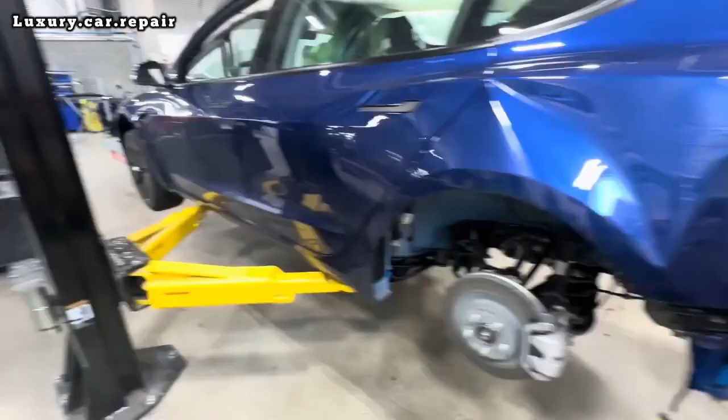So what we're doing now is we're going to set up this Celette Bench. Let me show you - here is the Celette Bench and here is our data sheet. We're going to set up these 4 points here, the front subframe, and these ones here, the rear subframe. We'll set them up here, we have our MZs there, our pistons are in there, and our other points are there as well. I'm going to set it all up here, slide that under there, and we're going to drop this car on top of it, and then we'll be ready to do the back end.

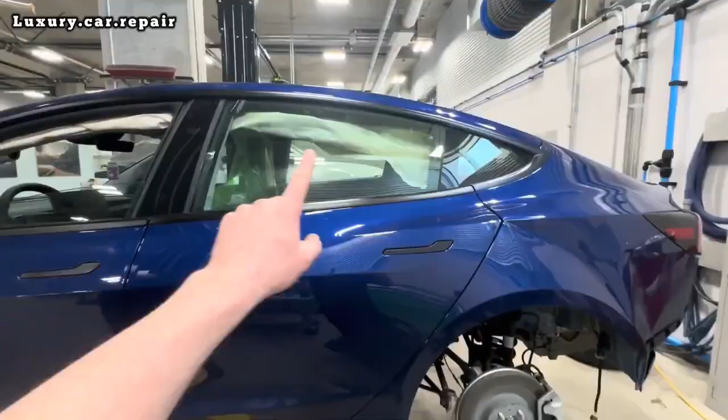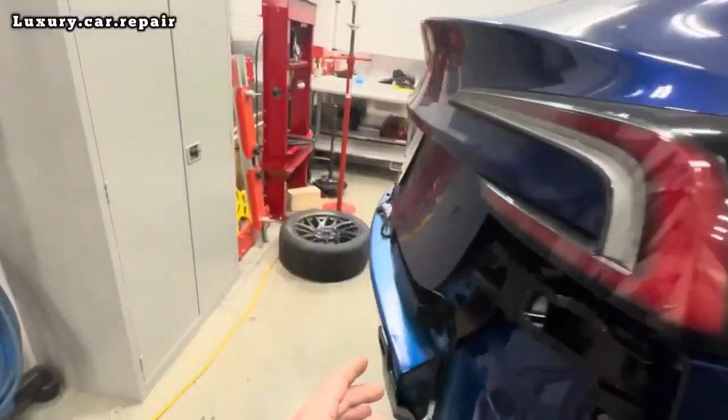Let me just show you the car again real quick. All the airbags are gone in the car, seat belts too. You can see there, it's pushed right up there, put a big kink in the quarter panel. You can see the tailgate won't even close because the latch and the striker aren't even lining up.

So anyway, let's get this one going.

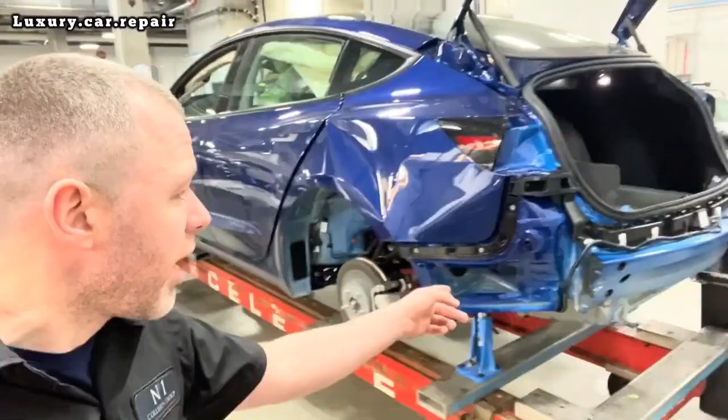Hey everyone, so now we have the car here. I am going to do a lot more R&Is. We have to take off like these, called the hockey bracket going around there, take off the rebar, take off this bracket, take out the charge port. I'll be taking off quite a bit, taking a few trims out, some stuff over this side as well. So a bit more R&Is, and then we'll be able to get this show on the road.

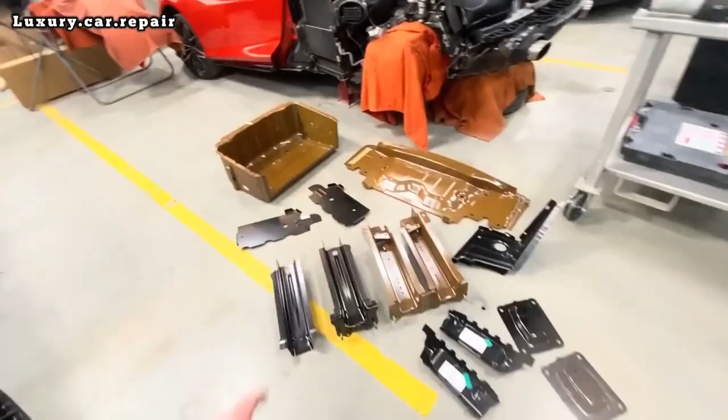Have all the parts here - end panel, trunk floor, frame rails, trunk floor extensions, end caps for the frame rails, quarter extension, wheelhouse extension. The only thing I don't have here right now is a quarter panel, but it's just down in parts.

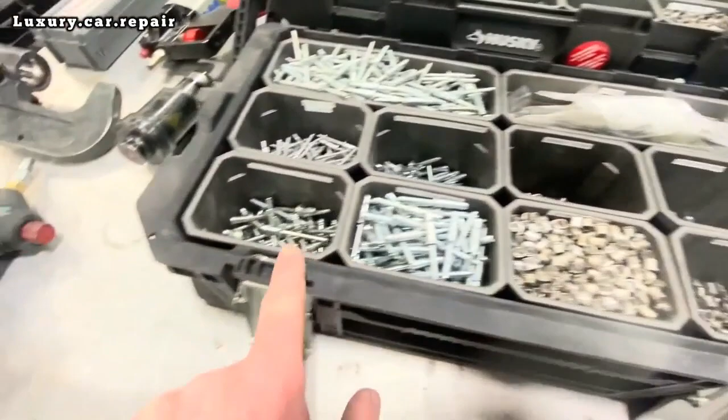What I have here, I got all the rivets. There's loads of rivets here as well, but I have them here already, so I haven't opened them bags yet. I've put a few in here. I like to try and be as organised as I can. So these are the ones we're going to be using - S18s, SO8s, structural 6.5s, your standard 6.5 structural, counter sunk structural, some of these nuts, some of these bolts, some 4.8s - a bit of everything anyway.

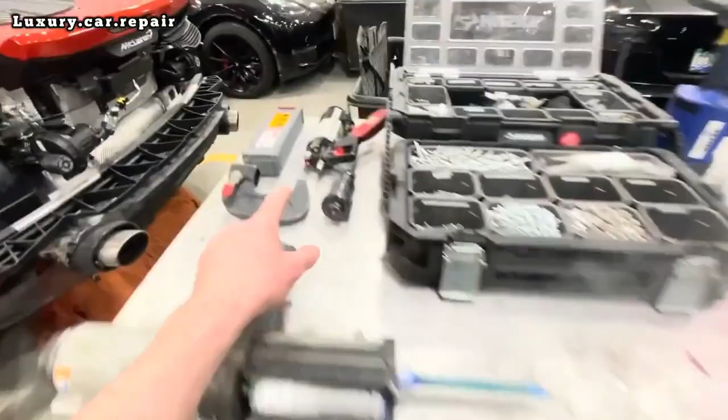So this is the Express 800, comes in this box here. I just have what I need out. This, and these are all the fittings for the top of it. The pneumatic glue gun - we'll be using Fusor 2098, that's for the big structural rivets. This is just for the 4.8s, so it's a lot easier.

But anyway, yeah, you can see it's all creased in there, all pushed in there. This is where the initial impact was - shoved them frame rails over that way, then a kink in that quarter panel right up.

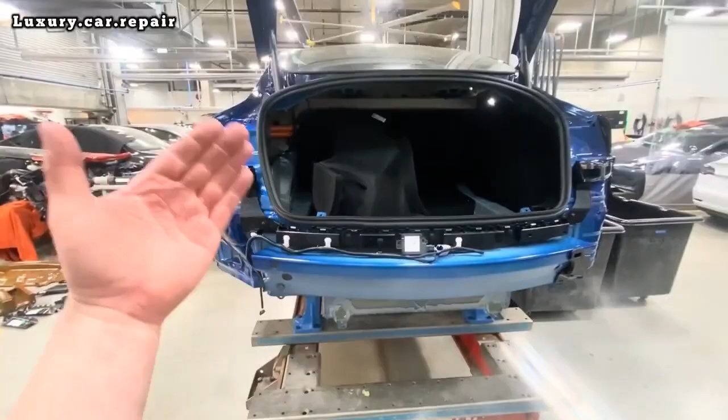So if anyone doesn't know, you're not allowed to pull on Teslas, they do not want you to pull. So I can't put this up in the Car-O-Liner and yank that car over. Literally it's just chop it off, put new ones on. So let's get going.

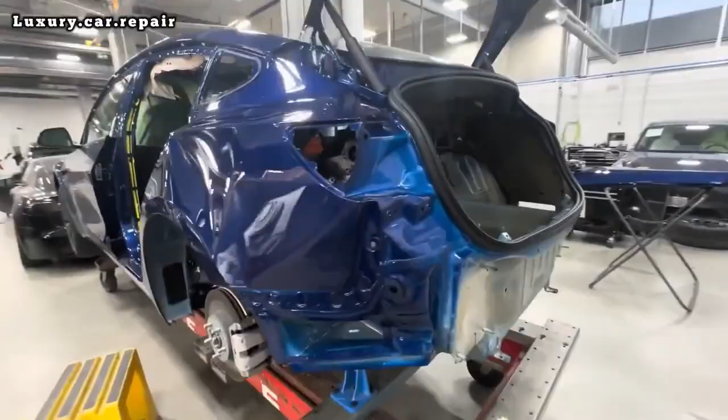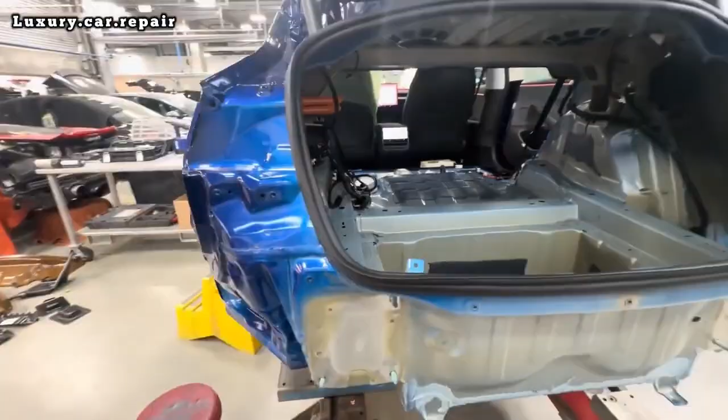Okay people, so we are finished R&I. I've actually just taken that rubber off, but have everything out here - all this is coming out, all this, have everything back there. Just gonna wrap all that up now as well. And then seats are all out, everything, seat belts. So now I'm gonna mask all this up or put a fire blanket over and start getting this panel off, back panel, everything. Let's go.

Before we cut this quarter panel, I just roughly done that with my auto writer.

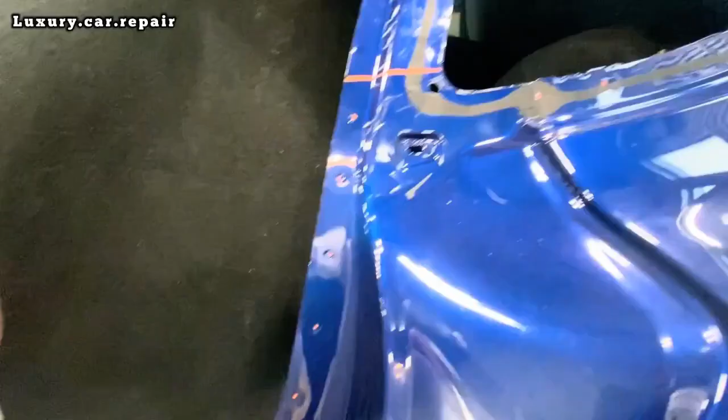It gives you measurements here, from A point down, and that's going to be 75 mil. So it's asking us to go from that line there down 75 mil. That's where the cut is going to be, probably for the finishing cut. I'm going to cut down here just to give myself plenty of room, so when I overlap the new panel, I'll measure it down 75 mil and do that there. It'll also give us a measurement from the hinge here, same kind of thing. So that's what we'll do.

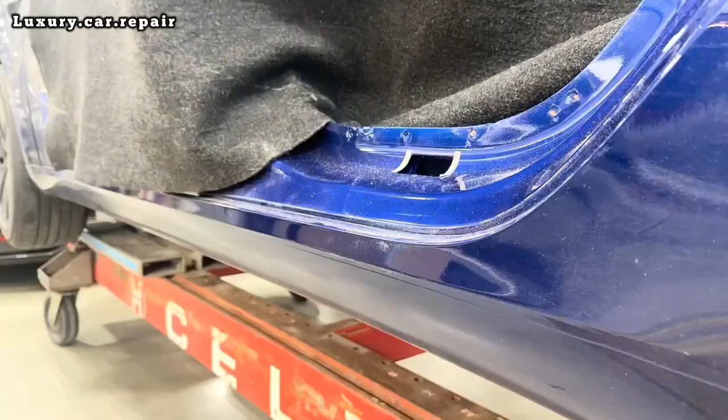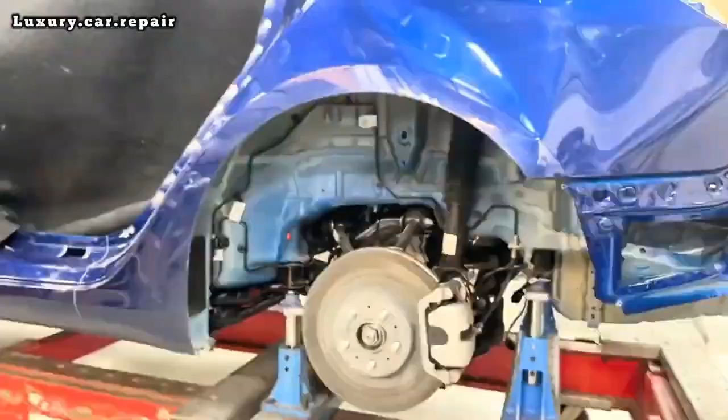What I'm using here is just your normal air saw with a hacksaw blade on it, I just cut it to size. Also, I use a belt sander here with 80 grit, just go through all your spot welds or rivets, just go through the first layer of the panel. Back to where the cut is, what I usually do is put a little bit of masking tape along it, just to give you a guide. I didn't this time because I'm used to it, but it's a good tip if you're new to the game and learning how to do your cuts. Along the arch, we just grind and separate the panels from the outer wheelhouse. Then I get a chisel, use a little heat gun to give it some heat, just to separate the panel.

Okay, here I have my Sawzall from Milwaukee. I'm just cutting away bits of material that I don't need, just to give me more access to more spot welds, so I can get in there with the belt sander, just make it easier for removing.

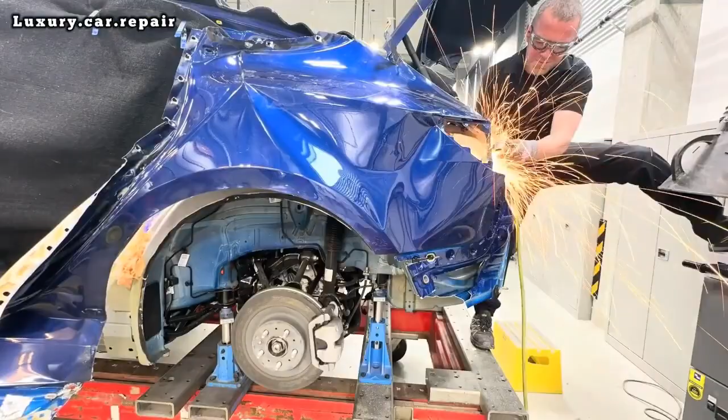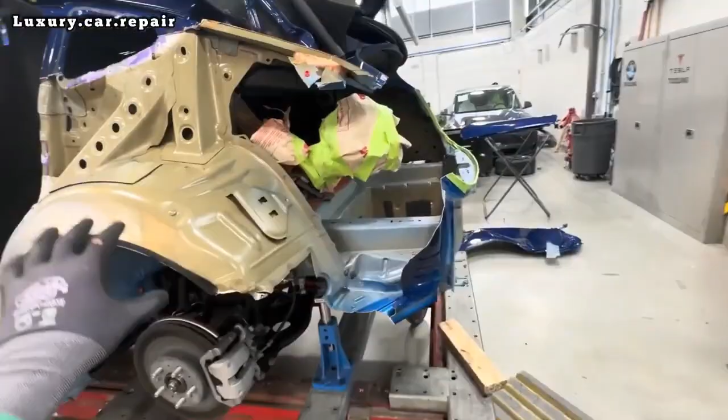Right, okay, just got the quarter off. Still have to get a few up here, belt sand a few of them off just to get this bit off. I'm going to take the rest of this wheelhouse extension off, and then we're going to get all this off with the Sawzall. This thing's an absolute beast. A few of the lads have used it, they've done one or two nodes - if anyone knows what that is, nearly half the car is missing. This thing chopped it all off. So we're going to get in here, cut all this off now, and then start cleaning it all off.

all off. Let's go. Home run, touchdown, buzzer beater, do it all now, all now, top corner.

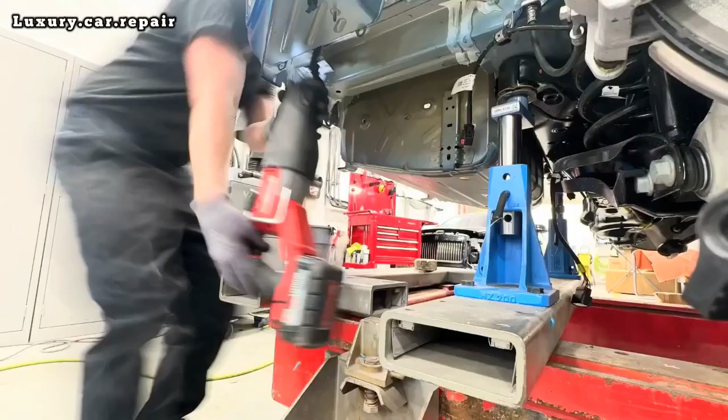So yeah, like previously in the video, I'll just get the air saw or the Sawzall and take off big chunks of this car that's getting replaced. I'm going to cut the trunk floor out here, then get the belt sander and take off this wheelhouse extension just to expose the frame rails a bit more. Once I have good access to them, I'm just going to chop the frame rail off so I can get to the inside of that frame rail at the back there. I have to get some spot welds and rivets out with the belt sander.

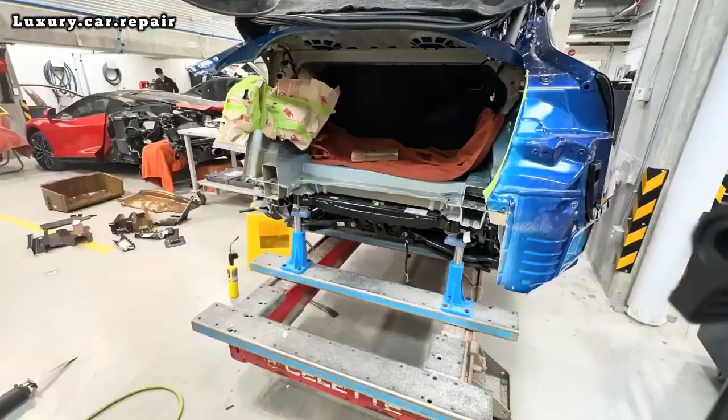No fear. Home run, touchdown, buzzer beater, do it all now, top corner talking home run, touchdown, buzzer beater, do

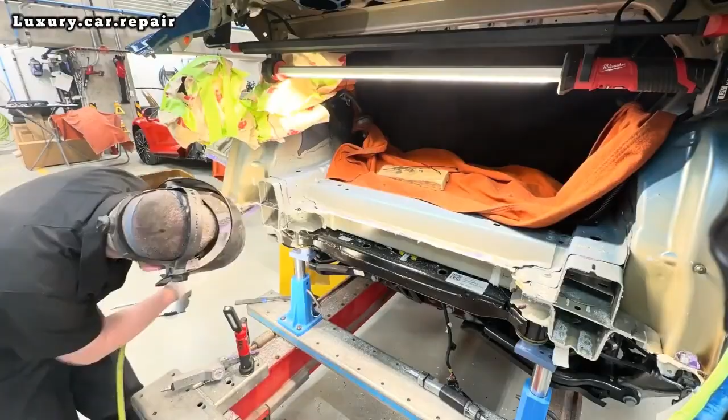Once I can get in here and do all my belt sanding, I'll get a heat gun in there just to generate a little bit of heat, and then I'll put a clamp on here to help me get it out with the slide hammer. Once I do that, it gets right in there, you can expose the whole inside of it, where we're going to have to clean it all off and get ready for the new frame rails.

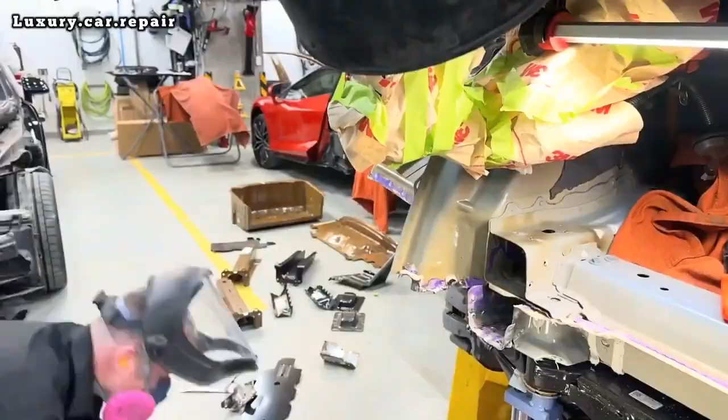Once I get one side done, just move over to the other side and repeat the process. Belt sander, get in there and get all them rivets. Shout out to Milwaukee with their flashlights here, really helped me out, brightened everything up for me. Belt sander, and then we'll just get a bit more heat as well, and then we'll chisel that out too. Same thing again, put a clamp on it and pull it out.

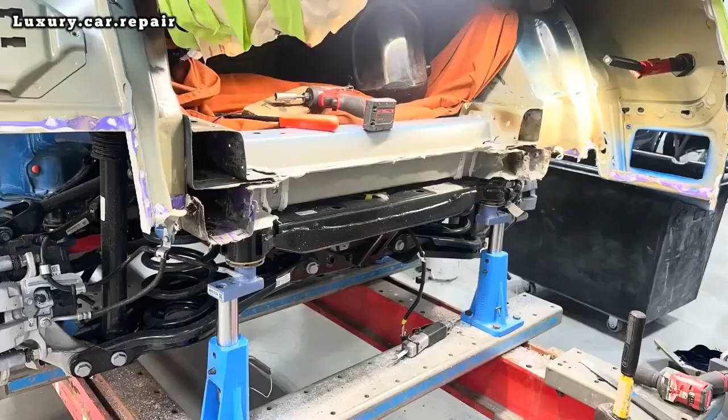Same clothes, still me. Only thing that changes is it changes on me. Home run, touchdown, buzzer beater, do it all now.

Hey folks, I am done for the day. Absolutely knackered. Let me show you how far we got.

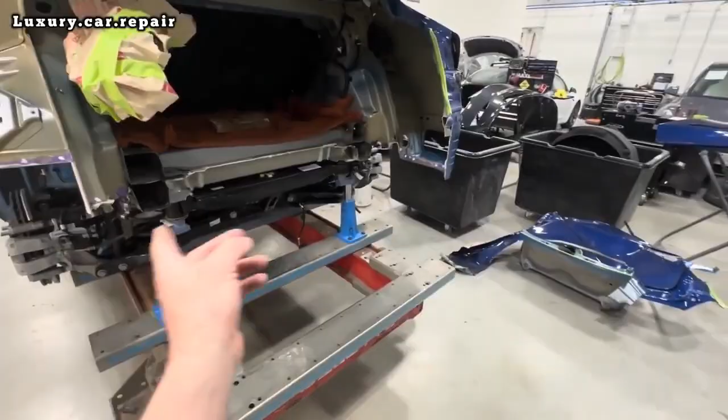So you've seen a few of the time lapses there. Anyway, quarter off obviously, got the extension off, got all the lower extension off here, the end panel off, the floor extension pieces, floor out as well.

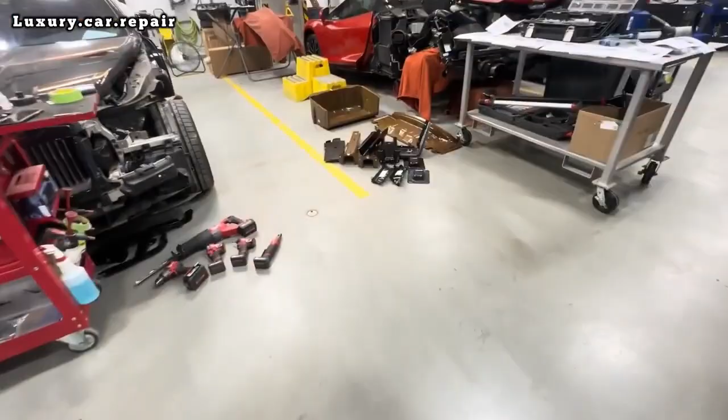I'll tell you one thing though, see these frame rails, obviously I just chopped them off, that's why they came off easy with the Sawzall, but then trying to get the inside of it out, Jesus Christ. There's a top layer, a middle plate, and a bottom layer of the frame rail. Let me show you over here. So the black one here is the lower frame rail, then you're going to have a plate that goes in the middle of it, and then the top layer on top of it. But see right here, like I had to get probably from here all the way into here out of that.

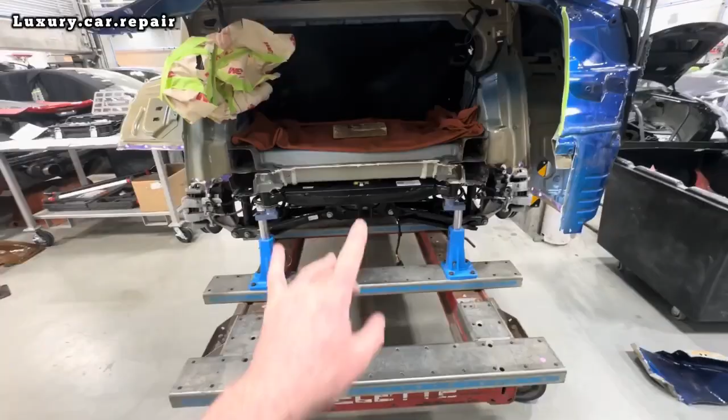It was a nightmare. I had to try and get the spot welds, not spot welds, rivets that are all the way in down there, all glued, to give it a little bit of heat to get it out. We got there in the end though. It was a bit harder than I thought, but got it done.

My back is sore. Monday morning we'll come in, we'll tidy it all up, we'll sit our panels in. We're going to put two points back here on the bench. They're going to show us where the frame rails go.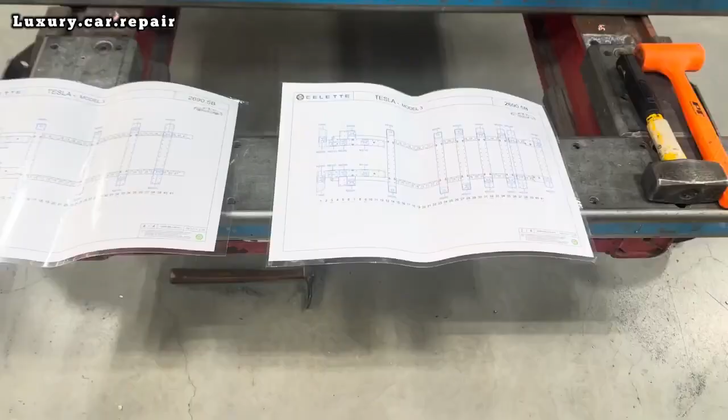Let me show you how you do this. So this is your bench, these are all your beams, which is these here. This is mechanical out, mechanical in. You can see mechanical in has less points, here you have way more.

So what we're trying to do is, we're mechanical in because we have the subframe still there. Just wanted to show you the difference. Mechanical out, you have way more points than you do here. But what we're going to be doing here is, we are going to be using this last one. We can still use it because it's just for the end panel.

See here, we're going to get our MZs, which are them blue things. We get our pistons here, which are them. And then we get our top fitting, which is that other bright blue kind of fitting, which is going to be this here. And what that's going to do is, that's going to go from one bolt.

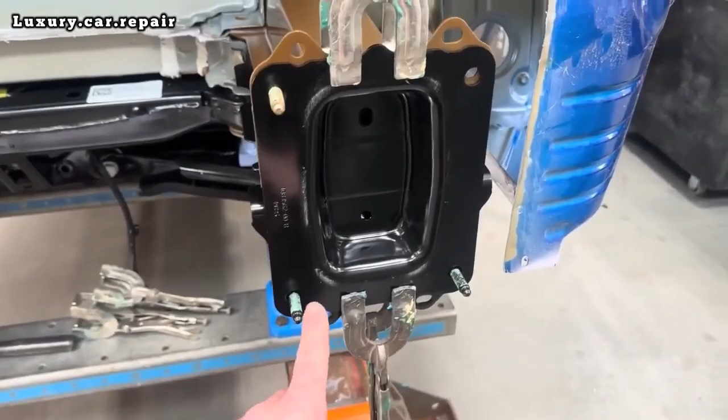Sorry, hold on, we don't have one there. So that's going to go from here across to that bolt, right? And we have that fixture on here, and then we have that all lined up. When it's lined up, then we know that that frame rail is in the correct position.

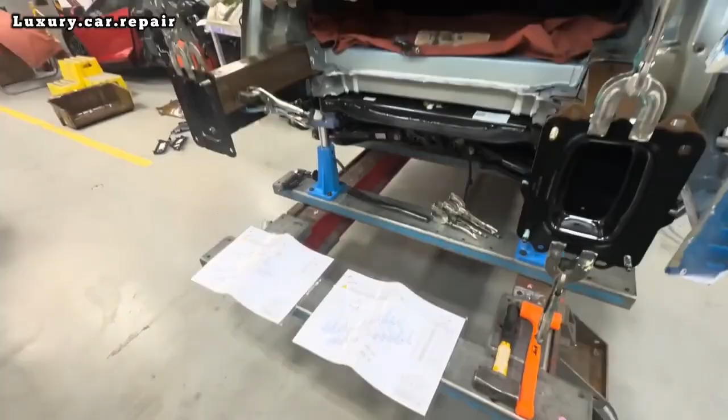All right, so anyway, let's get this point together and make it all make more sense for you, right? Let's go. Right, I went and got it all.

These are your MZs 260s, there's the pistons, and this is a kit that we get. This is for the Model 3, we have all the other ones over there, Model S, Model X. But inside here is the pieces I was talking about, the piece that goes up there. So we have it all here, let's get it on.

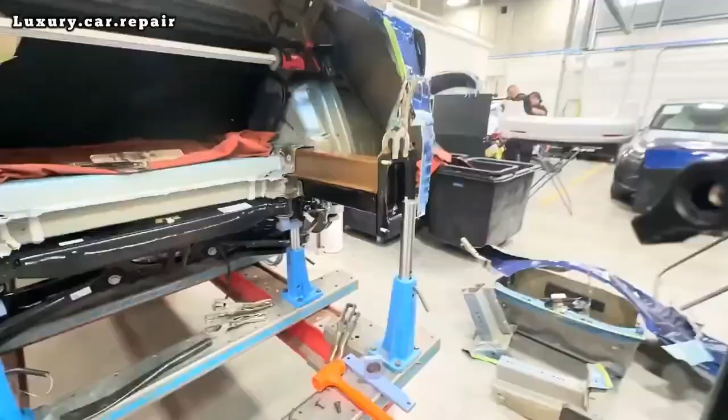So, got the fixtures on, got the frame rails in, got the end caps on, got all the holes lined up there, so got the nuts and bolts on, everything's fitting up nice. Have me old gap persuader there, has a part number now.

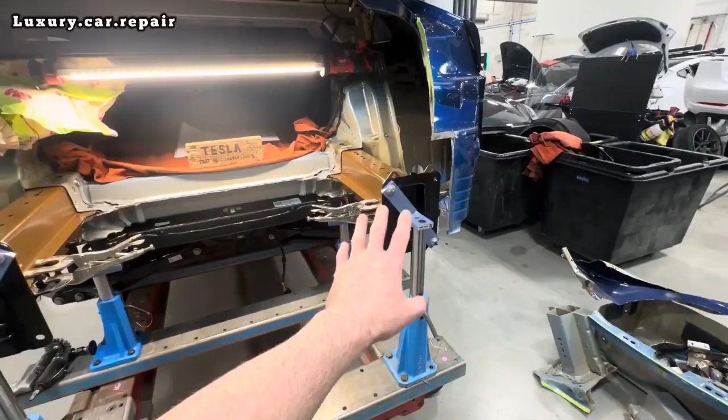Right, so it's all lined up. Next thing is what we need to do is, we need to start making the holes here for the new rivets to go in. Same down here, rivets here. The bolt is in there now. That bolt goes into this frame rail here.

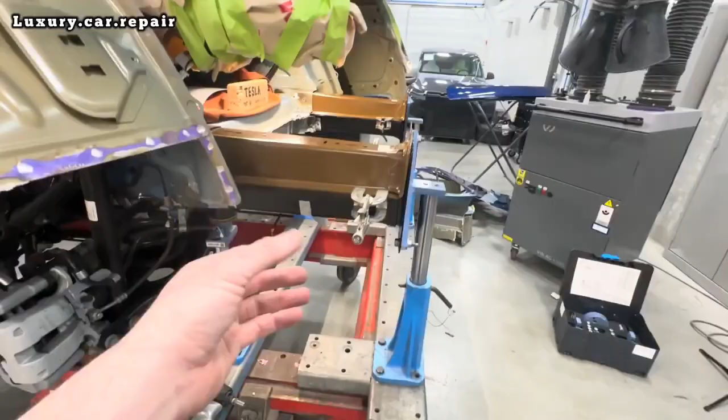That's in. I have to look at the procedure as well. I don't know, I think it's 6.5 structurals to go along here as well, same with this, same with this. So that's what we'll do now anyway. We'll get all that, the holes drilled for that, and then we'll go from there.

But she's coming along anyway, it's a grand job now. I like this Celette bench, I like the Car-O-Liner as well, but I like the Celette bench too. It's kind of like foolproof, it's just a fixed bracket system. Doesn't line up through the holes and you know it's in the wrong spot.

But yeah, let's get going. Alright Connor, yeah that's not nice.

Right, let's get going, on to the next stage. We have our rails on, all lined up. I'm just marking where the rivets are going to go.

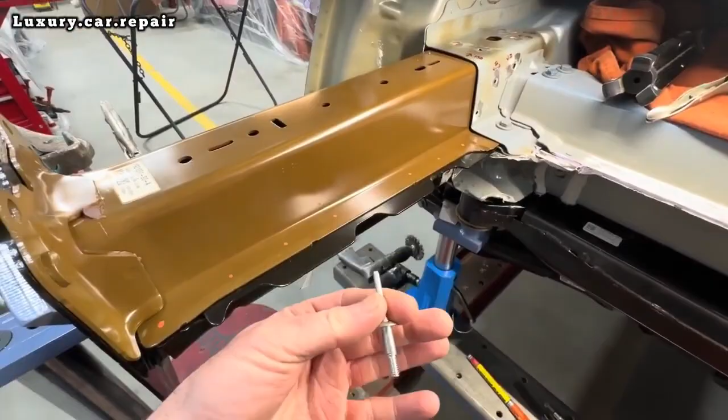We have a lot of these 6.5 structural rivets. It's going to be 8 on this side, 8 on that side, then we have some here.

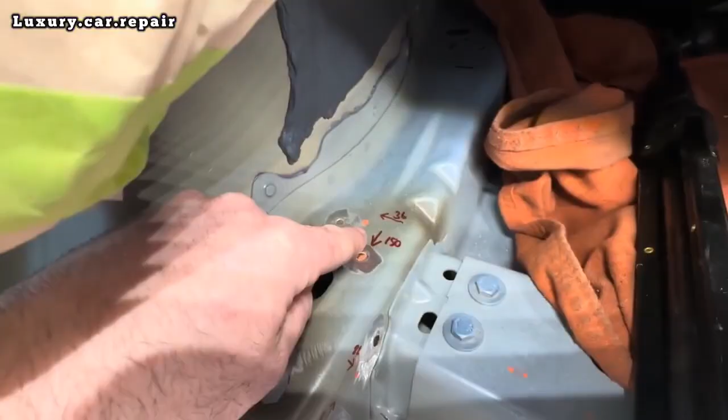There are measurements where this has to be 150 mil all the way back to here, and that's that rivet there. Then this rivet here has to be 36 in from the edge, which is that orange one there. They do not want you to put one here.

Then there's more here, 68 back for this orange mark, and then 22 down. So you see it's all here.

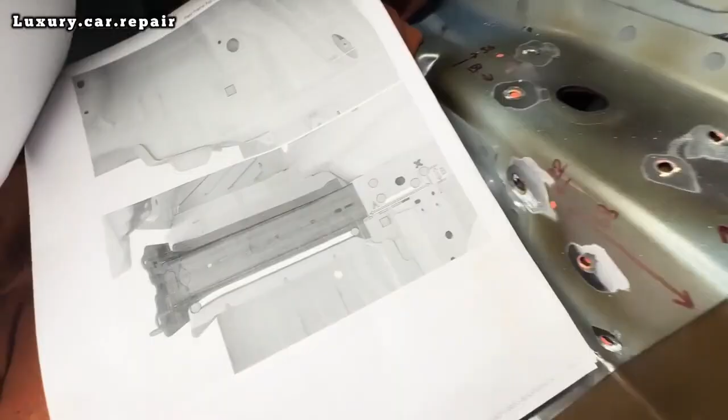Show you now, there you go, all the measurements, and it will show you on the next page. So they have to be in specific spots.

Same under here, I've got that all measured as well. So what we're going to do now is start making the holes for these 6.5s.

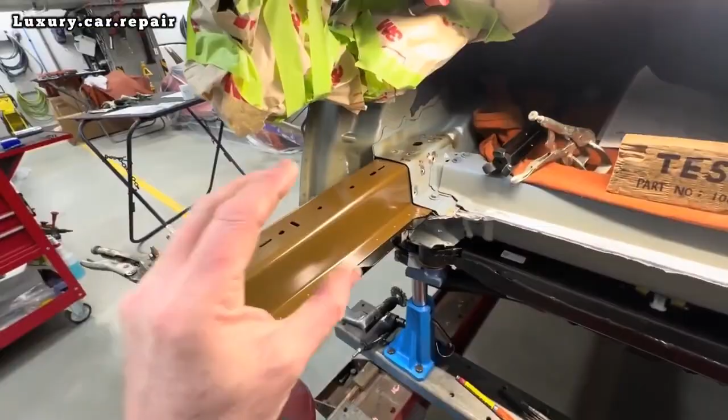Then we take it all off again and start putting it back in sections, start putting the rivets in. Then we'll be putting the end caps on, then the little extension on here in the corner, then the cap on. But anyway, let's get going.

Do you like me block? Look at that, has a part number and everything. Grand job, right, let's go.

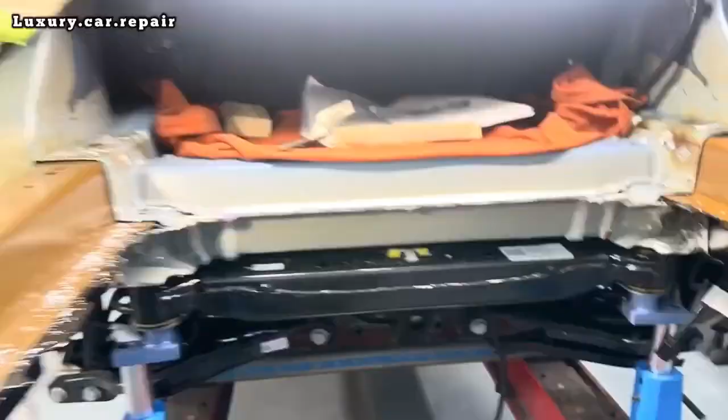So we have all the holes drilled, here we go, all there. Same on this side.

So what I'm going to do now is take them all off, take the top section off. The middle plate, I'm just going to scribe a line along it when this is off, so I know exactly where it's to go back in. Take the plate off, take the bottom section off.

Same on this side. Then what we need to do is put the plate back in first, glue and rivet it - well, not rivet it, sorry, we slide it in here. It wants bolts in there, I think 3 or 4 nuts and bolts in here.

And then when we have that all glued in, then we can start with the rear and top. So anyway, let's get going, I'll show you when we're doing it.

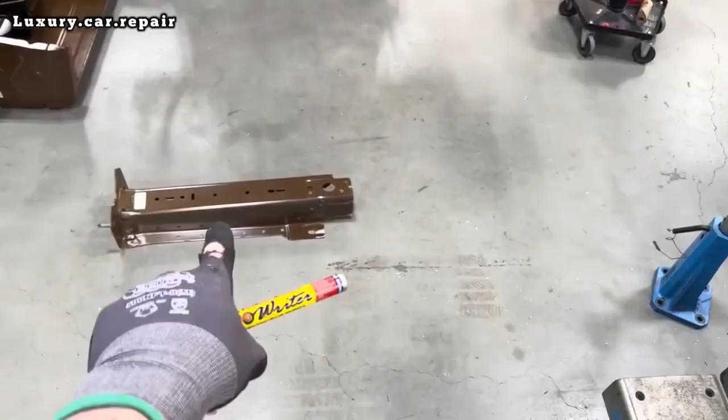Okay, so just took the top piece off. There it is, so this is the plate I was talking about. Hold on, let me zoom out. This is the plate that goes in here.

So what they want here by the procedure is nuts and bolts in here. Okay, so I want to make sure this is in the right place still.

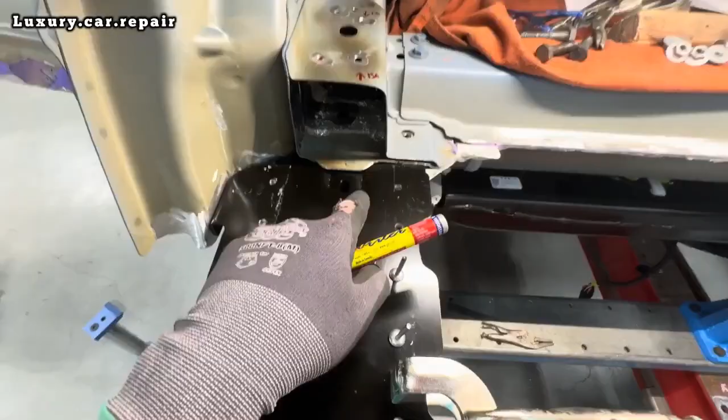Now I have the rivets in that I drilled, just have them all in there so I know it's lined up, clamped. I'm just going to run a writer along here so I know it's in the right place, because I have to take this bottom section off as well. So we'll go ahead and do that, and then start prepping it for glue and rivets.

There's Connor, everyone, loves being on the camera. You alright buddy, what's going on? Never seen that before.

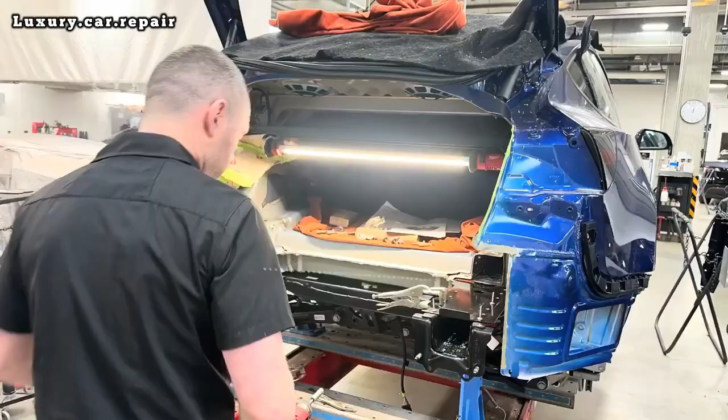Right, so what I'm doing is, there's my mark. I'm making sure this is in the right position, which it is, and then I'm just marking these holes here.

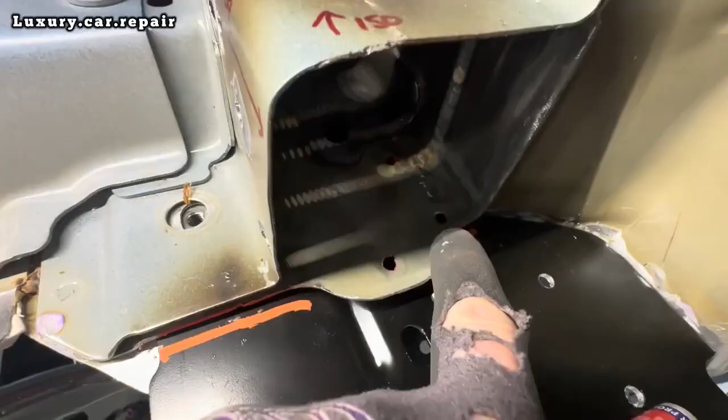And then I'll take the plate back out and drill them, because the problem here is I have one of these kind of right angle drills, but it won't fit in, doesn't fit underneath either.

So the only way I can do it is mark these, and then I'll just mark them and drill a hole, take them back out and drill a hole.

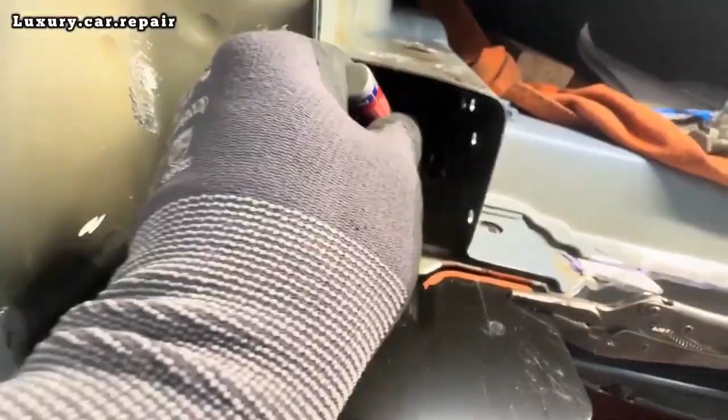Crazy, let's get one all the way in there, look. Mad setup, anyway, we'll get it done. Take them off, drill the holes, back in.

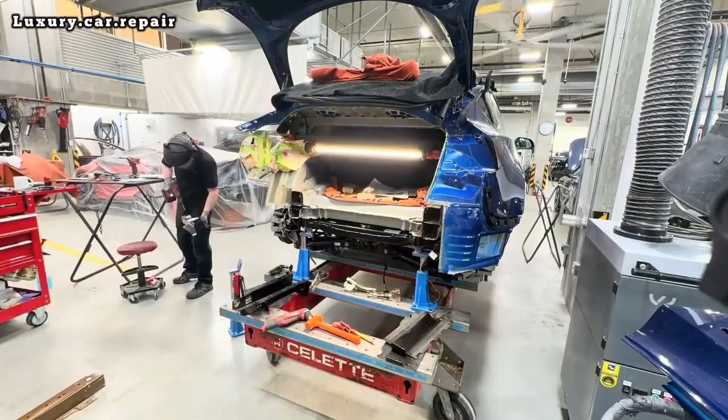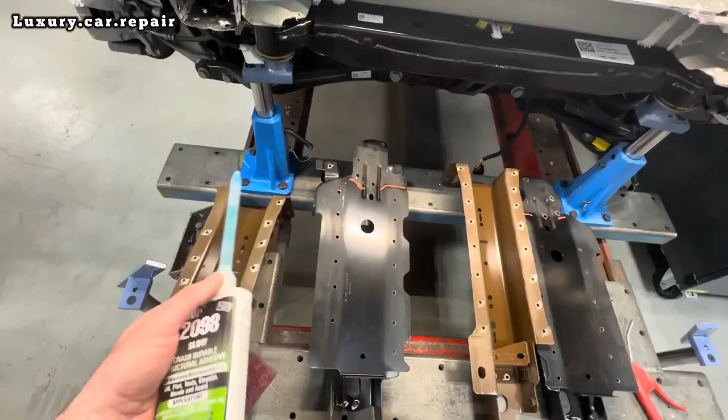Okay, so what I just did was scotch where it's getting glue and riveted. What we're using is Fusor 2098, approved by Tesla. Regarding the e-coating, if I'm bonding two materials together that are the same, I'll bring it back to bare metal. But if I'm bonding aluminum to steel or steel to aluminum, since they're different metals, I'll leave the e-coat on and just scotch it, just to give it an extra barrier. That's what we're using, so let's go ahead and get this done.

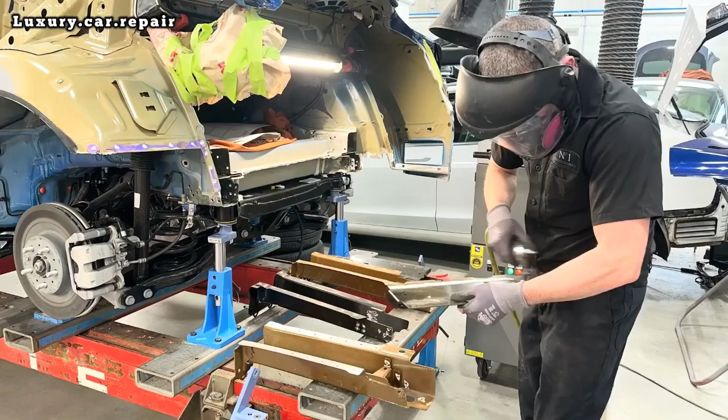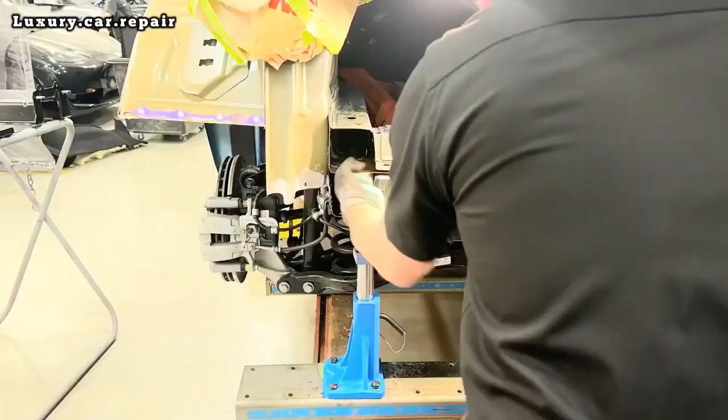What I'm going to do here is clean off all the panels, and then I'll get some wax and grease remover and clean off all the panel where we just sanded off the e-coat, making sure everything's nice and clean, then we'll go to the body of the car. We'll do the same on the inside of the frame rails or anywhere we're putting structural glue. After that, we'll apply the structural glue, and then I usually get a spreader and spread it evenly on the panel and on the inside of the car before we attach the piece.

Okay people, so there's the plate in. As you've seen, it was just 4 bolts and 4 nuts underneath it, and you have to tighten them to 13 Newton meters, that's why we had a torque wrench there. I still have 2 structural rivets to go into this corner, but I'm not going to put them in until we have all the rest of it in, then I'll bang them in. So moving quickly, let's get the lower section done. Let's go.

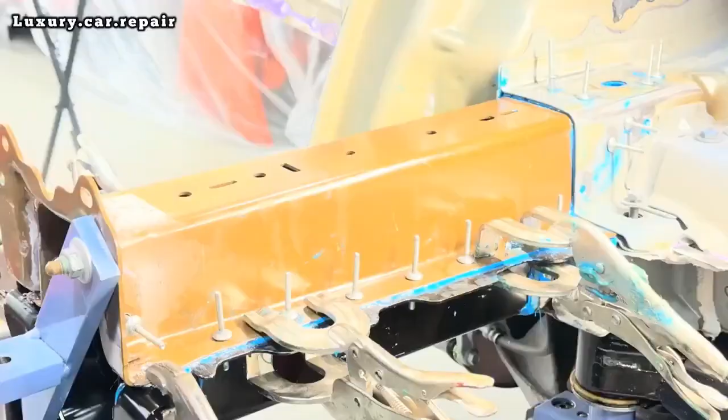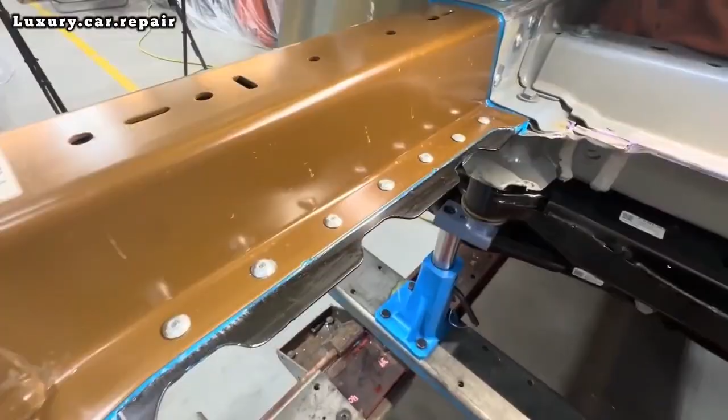Right, okay people, that is the frame rail in. You have all the rivets there, see it in the time lapse, it's up here. That's under there.

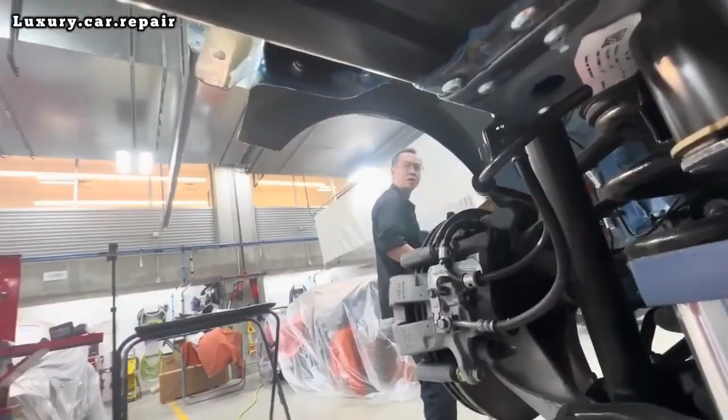Underneath. So what we're going to do now is put this on, it's called a glove, there it is there. There's all the rivets there. The funny thing about it is this lower frame rail piece here didn't come with the glove, but on this side, this frame rail piece from the far side came with the glove. I would have obviously preferred it like this.

Another funny thing is this one here, I just gave it a few little taps, nothing crazy, just to get the frame rail in there, and this fell off, just literally fell off. It has a spot weld here with glue, spot weld here with glue, and a spot weld here with glue from the factory, and I just gave it a few taps and it fell off. I couldn't believe it, unreal. So what I'm going to do is just follow the procedure for this one, which is just a structural rivet and some glue.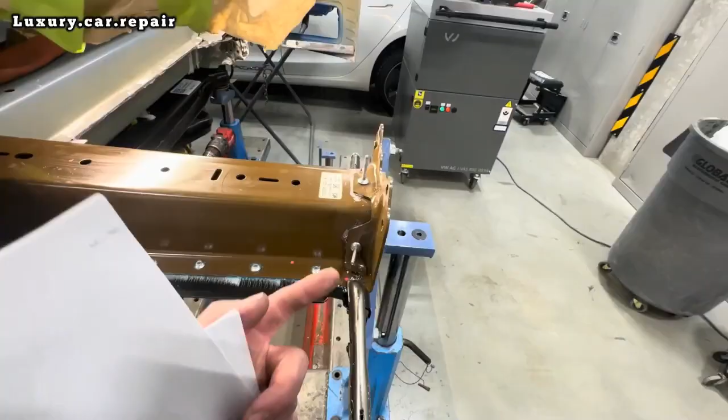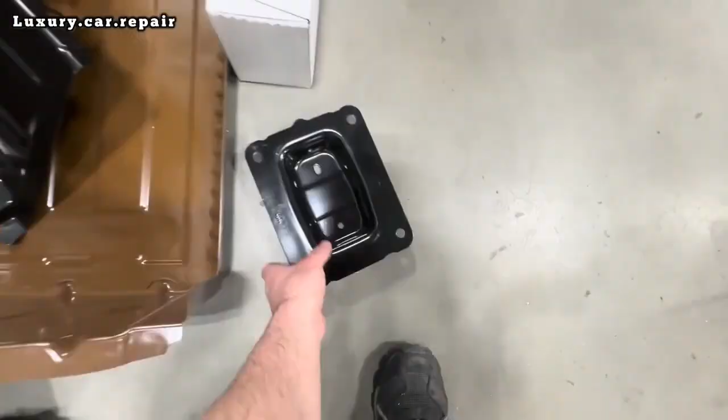And then we have to put that on, but also we have to put the rear end plate on, which is this, so this has to go in there as well. What we'll do is take this mount off again, sit that in, and then drill the holes, because the holes were here, go through here, but drill holes for the bottom one. So we'll go ahead and do that now.